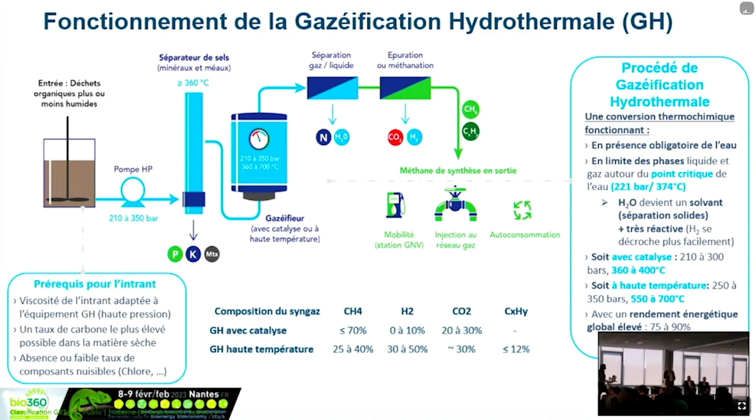To recover the gas, we separate what we call the gas to liquid. On one side, we get the high pressure gas, which we can recover or methanize to make it injectable into the network. On the other side, we recover a liquid, which is water with nitrogen. This can directly be reused, or sometimes we have to filter it, and then we can make it available to industry for various purposes. I think that's it in a nutshell.

I don't want to spend too much time on that.

I think here you've got an assembly of families of feedstock biomasses which can be reused and recycled using this technology, but also fossil waste that still exists, which needs treatment and high performance treatments in particular. There are industrial players in the plastic or microplastic sector, but also in the oil sector.

As you can see on the chart on the right here, this technology is integrated within this circular economy approach. We're trying to maximize the recycling and reuse. The final goal is to have as much as possible zero final waste, and to value whatever can be valued, recycle or reuse what can be, and to get rid of anything that may be harmful, in particular bacteria, viruses and other pathogens.

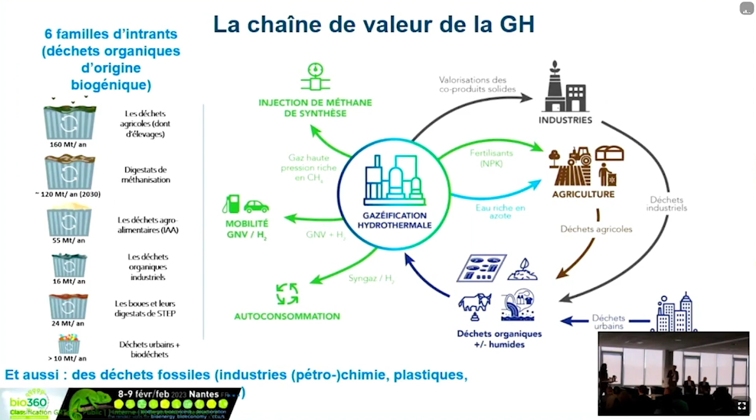We don't need much land here compared to methanization. It's 10 times less footprint we need here. Compact, it's modular. Why is it modular? Because we're looking at high pressures here for different reasons, we have to limit the size, and we have a modular approach here. Sizes for 5 tons per hour maximum. If the need for treatment goes beyond that, we add a second or even third module.

The energy yield is extremely high. In most cases, we're between 75 and 85%, which is excellent performance for this kind of conversion technology.

And we've also, if we take the GHG and the life cycle analysis, it's very positive here. That's what we see in literature anyway. But we're going to further improve things to make sure that we can use it in a very tangible and concrete way.

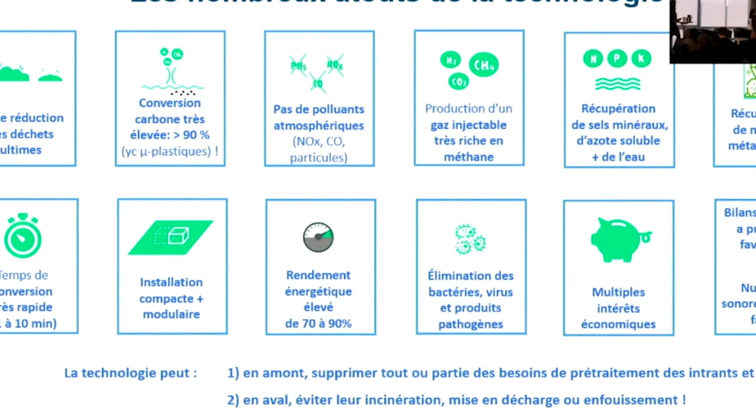And the last point is the sound and smell here. Nothing makes any particular noise, it's just the pumps. So it's quite silent as a technology, and we can very easily insulate it, and there's no particular smell.

The last point is a lot of financial and economic interest. Obviously, with the gas, we're generating significant added value. But that's not all. We can obviously inject it into the network, and we can stock it. In France, fortunately, we've got an infrastructure which is pretty good to be able to compensate the variation between consumption and production.

We've also got other additional aspects which we need to mention, the link to the service, the processing of the waste, and the use of this waste. Potentially we can reuse all of these other elements and byproducts, which means we have a great added value as far as this technology is concerned. And we've got additional revenue that can come by getting rid of or reducing certain costs that no longer exist or which are strongly reduced.

And then, sorry, I haven't finished, I haven't quite finished here. This is quite crucial here now today. I made this mistake, sorry about that. I don't know if we've got any copies of this white paper. If not, it would be good to bring a copy here and show it to you. There we go. Thank you very much for that.

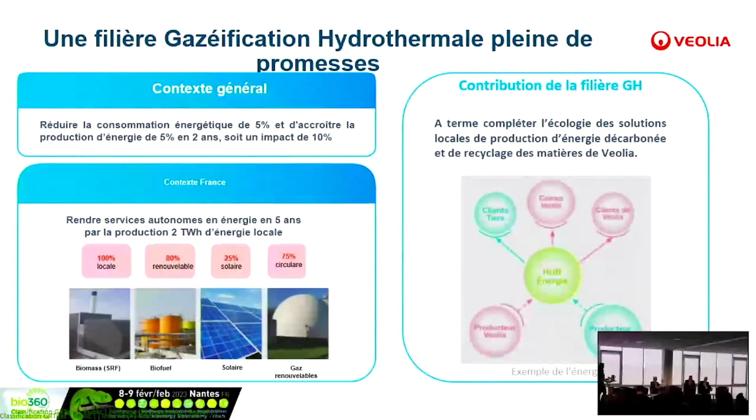If I come back here and go into a bit more detail, we're talking about these key challenges in terms of this sector we're participating in, this target which is net zero, to contribute to net zero. VEOLIA has clearly signed up for this. We've already got an offer, but once again, we can clearly say that hydrothermal gasification, HG, clearly ticks all the boxes here. VEOLIA clearly wants to target recycling, the recycling of organic material and also fertilizers.

And then afterwards, when it is not possible to recycle, then we can consider thermal recovery here or reuse. That's incineration. That's something we would like to avoid. But we can do it, because we can recover the heat.

And if you take the HG, we can clearly see it represents the hierarchy. We're going to produce gas, we're going to produce minerals, we're going to produce material, which will be fully within this hierarchy. In this description, we've got a process, as the title says, it's full of promise here, and it's going to enable us to generate revenue, generate services, and have a geographic approach, with scalability - small, medium, and big.

Now, our contribution to the HG - we got together with the public authorities here and local government here. Now, I have communicated this to my colleagues, but at last I can communicate and share it with everybody. This is the kind of foundation of what we want to do now and in the future.

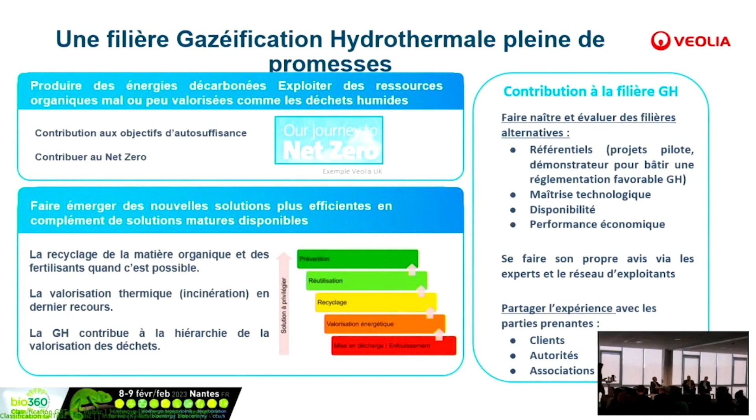We've already shared - a lot of effort has been made with Robert. We need to share with the users, clients, public authorities, whatever, provide a regulatory, technical framework as well here, and also a financial framework here. As I said, full of promise, and that is clearly what we're trying to develop.

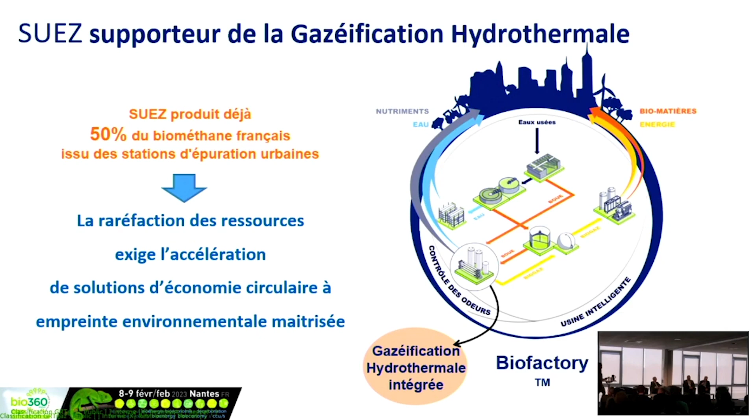You also are a member of this natural group, and you also contributed to the white paper. Why? Well, for all the reasons I just mentioned here, SUEZ was involved in this working group. I'd like to thank all the work that was performed by Robert and his team and the other people to be able to come with this great outcome, which is the white paper, and all the other work performed by the work group.

The white paper is the first deliverable here of this working group. In this slide, I'd like to insist on 2 points that you can actually find in the white paper. I always like to take the example of sludge treatment here. The development of this market clearly shows that the current solutions are facing issues in terms of acceptance and acceptability, and also facing more restrictive regulatory frameworks to avoid pollution and environmental impairment.

Now, as presented within the white paper and also within the discourse of Robert, hydrothermal gasification is the possible answer to this issue, and can solve issues such as pathogens, micropollutants that can be found in water, but also a possible coming back, making sure that the nutrients can go back to the soil here, and that can be better streamlined and better optimized, and the control of the environmental footprint.

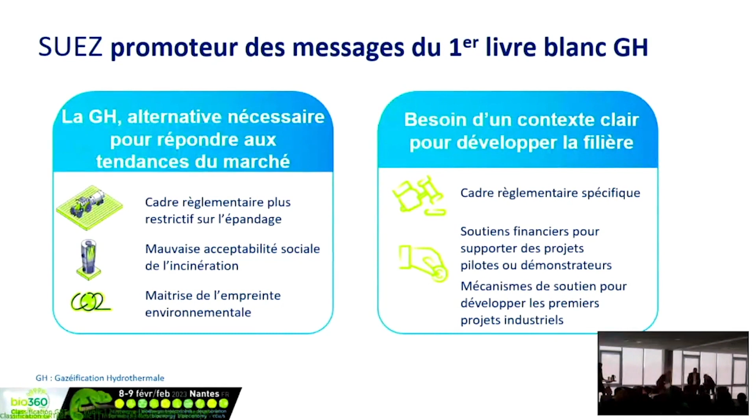We can move on to the second roundtable, which is focusing on technology. And we've got a special guest from the United States. He is the founder of the Genifuel company, and Genifuel is a company that is developing a hydrothermal gasification unit in cooperation with Vallejo. So we have here Chevaux as well. We will have Sofiane Zalouk and Javier Vallejo for the technology. They are responsible - the R&D manager and commercial manager.

We will have Frederic Juillard. He's the president of TreaTech. They are working on technology, and he has a team of 10 people. Frederic is responsible for the circular carbon economy strategy, and he's working in hydrothermal gasification as well.

So we are going to start with the first question that will be asked to Thomas Chevaux from Vinci Environnement. You are doing a collaboration with Genifuel. So what are the advantages for both parts?

Hello everyone, and thank you. Thank you for this invitation. Okay, maybe I will show you some images. Okay, no, is it working? Okay, there it is. Okay, maybe we can go back to the previous slide, please. No, maybe it's not working.

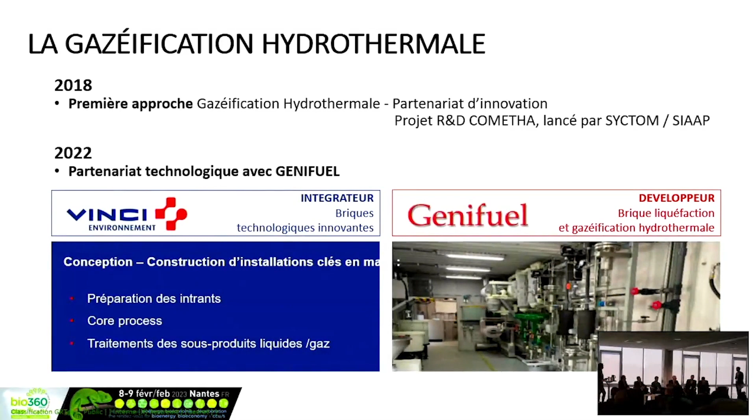Okay, in our company, well, we have been working for a few years - we have 50 years of experience. Sorry, my slide is not showing properly. So we have 50 years of experience in waste treatment engineering, and we mainly concentrate in the field of gas. Vinci Environnement is the engineering company that wants to offer different services. As constructors, we want to go more into GreenGaz.

So we've been very aware of the progress made in this field. After having worked in a partnership called COMETHA, we were able to show that this hydrothermal gasification process is very positive in general. So we tried to see how we could keep making progress.

So nowadays we've met Genifuel. They are present here. We have James Oyler here, I will give the floor to him in a few minutes. So we decided to work together. VINCI is working as the integrator, the design of turnkey plants, and in order to see all the process related to the preparation of the feedstock.

And the idea is that we could treat all these products. Genifuel will help us regarding liquefaction and gasification. Genifuel is a company that has been working for many years in this field, and they will have the floor later. But we thought that this partnership would give us the opportunity of accelerating our development, because we had a certain maturity in the field.

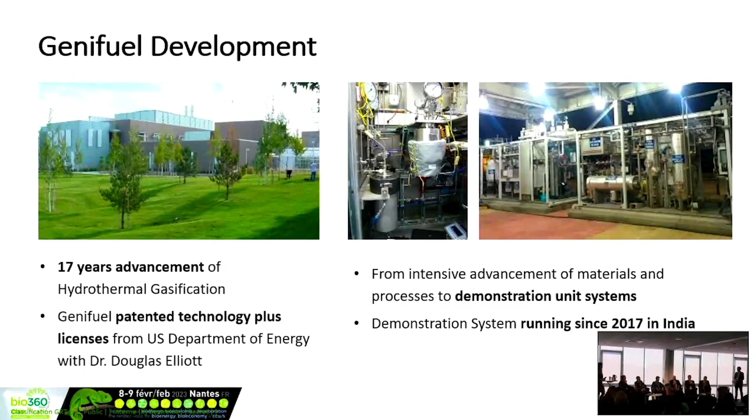In addition, since that time, we've built several other systems. One of them, which has been very useful, is a mobile system that can be moved from place to place. It has been operating in multiple locations, primarily for the processing of wastewater sludge, in multiple cities - first in California, then in Oregon, and then most recently in Florida, with several cities, including Orlando and a smaller city just north of there. We can move this from place to place to demonstrate with different processes, different wastewater processes, and different types of sludge. So we have a scaled up system that we built for India, and then a smaller system that can be moved from place to place.

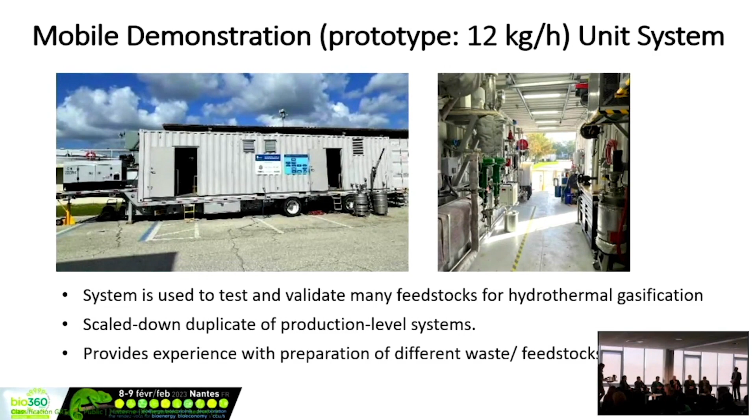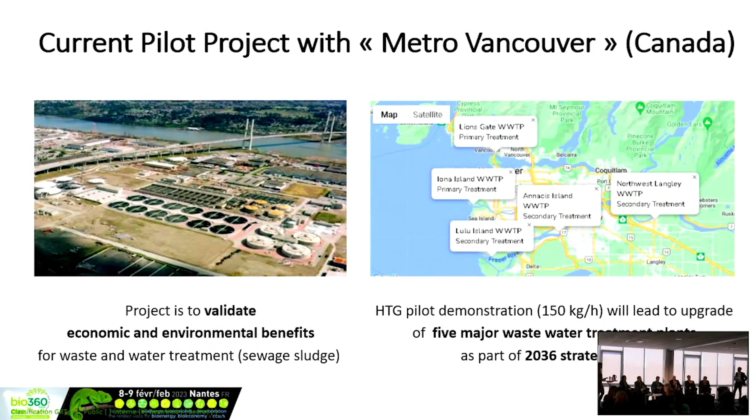The next project we've been working on is also wastewater, for the city of Vancouver in Canada, at one of their large plants. Vancouver has a population of just under 3 million people. There are 5 plants that provide the processing for that population, and we are at this one shown on the left, which serves a population of about 25% of the city. We will not be doing all of that flow - we will do a portion of it in order to provide data for the city to implement this throughout all 5 of the treatment plants. That project will extend through the year 2036. It's part of a large strategy to upgrade the entire system to hydrothermal processing.

So this has many advantages that we have developed for both hydrothermal liquefaction and hydrothermal gasification. And I'm going to give this back to Thomas because this is a very busy slide and it's easier for him to do this in French.

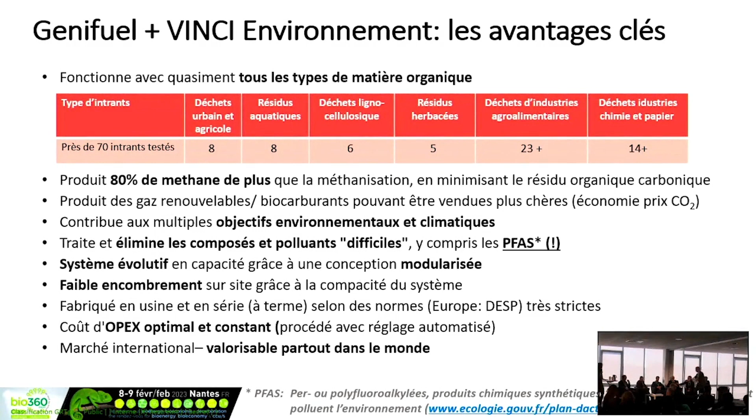So how did you end up positioning yourselves in gasification? How are you thinking about how you're positioning yourself in this kind of situation?

Yes, it was quite natural for us. The idea to concentrate on hydrothermal gasification, it's a good experience for us.

So hydrothermal gasification is a treatment for organic waste. We have another way, we are using hydrothermal oxidation with less oxygen, so there are many different conditions that we can have.

So the idea is that we are going to learn more about the materials and the processes. So we also have a KIT, so we are developing a European solution in this case.

We are located 15 kilometers from France, near Strasbourg. So the idea is that we have a laboratory where we have an installation, and we are trying to create a pilot project in this sense, and then after that we could have a bigger facility.

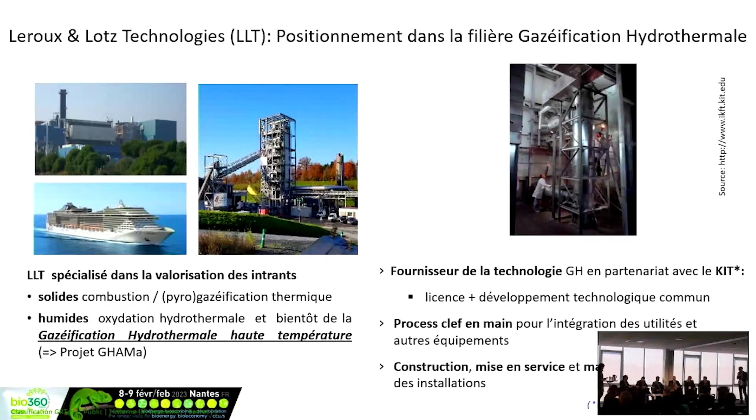I will give the floor to our colleague, Stéphane. So now you are working on the development of the technology, you are working on the GHAMa project. So where are you now in terms of technology, and what are the specific facts that you would like to point out?

The GHAMa project is a project of industrial demonstration. The idea is that we would like to treat what is produced at the LEROUX plant. Nowadays, we are in the course of engineering studies, so we are studying the equipment, the reactor, and all that.

And nowadays, the idea is to continue with this study in order to see how we can improve the price of the demonstrator, the financial aspect. So we want to improve all that by next year, and we will concentrate on this demonstrator.

So in 2024, maybe we could do some different tests on this demonstrator. So in order to come back to Robert's question, in this case we have an industrial demonstrator with a high capacity. The idea is to see how we could test two different configurations and to have a facility that will work constantly in a permanent way.

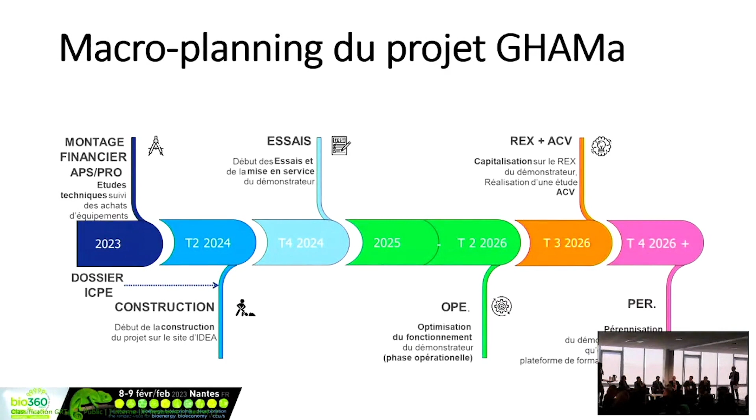Thank you very much. We have another question for Frederic. So you have already done a pilot project. What do you think will help you keep developing this project, and what are you concentrating on?

The idea is that we have 100 kWh being built in a partnership. So we have created a different company. Before that, we spent many years devoted to research and development. With the Paul Scherrer Institute, they have a lot of experience regarding this catalytic work. So the HTG, hydrothermal gasification at a higher temperature, is key for us.

This catalyzer has quite a high selectivity, and this will allow us to work at different temperatures. It will give us the opportunity to have catalysis and to see how we can reach the synthesis gas that we would like to have.

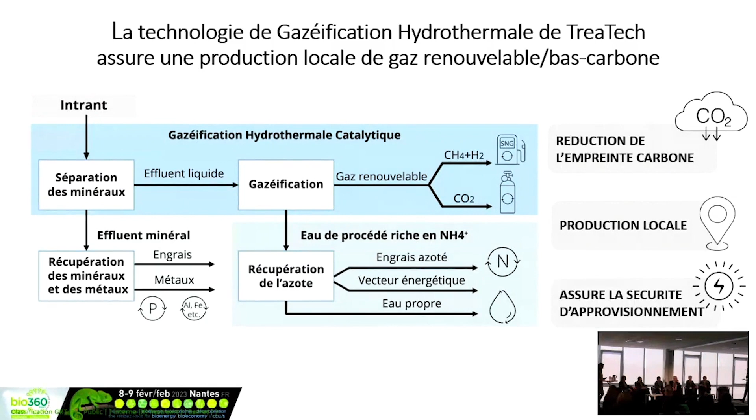So where are you working now? What are you exploring in this field? Maybe you could speak a little bit about what you're doing. Thank you.

Okay, so we started making some studies with different feedstocks, feedstocks that could not be transformed or converted into gas. So these were feedstocks that should be reused.

Sorry, the sound is very poor. We cannot receive the message properly.

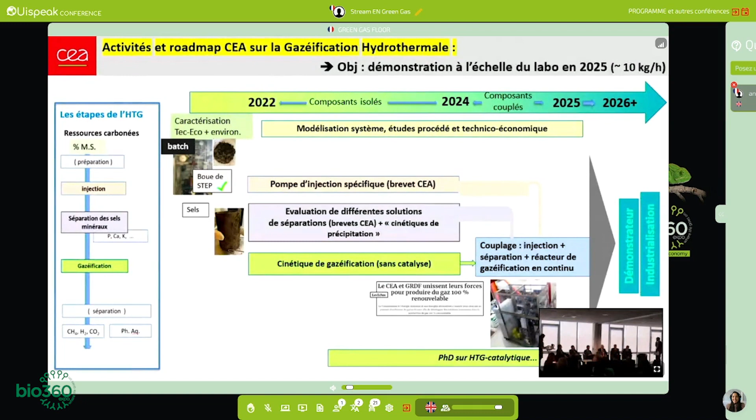Thank you very much. I will finish with the last question that I would like to ask Thomas. I would like to know your opinion for the 2030 horizon, how you are expecting to develop the French market in this sense regarding this technology.

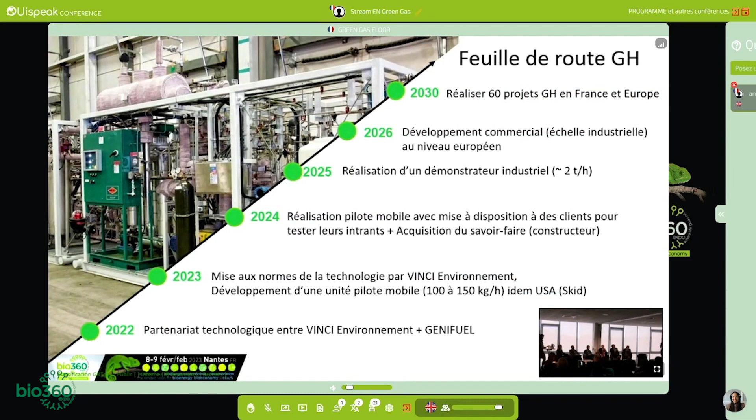Okay, our roadmap, well, we've made a small program over the next 10 years. The idea is that we want to keep progressing in our partnership with Genifuel. We want to develop pilot projects with a design similar to the one we made in the United States.

So we are going to do this kind of technology transfer. This pilot project will be available in 2024, and the idea is to do all the feedstock tests regarding the know-how as well. We will keep working with this industrial demonstrator in 2025, and we will do the commercial development at a larger scale later. So this is our roadmap.

Same question for Frederic Juillard: what are the next steps for the development of this technology after all these successes presented here?

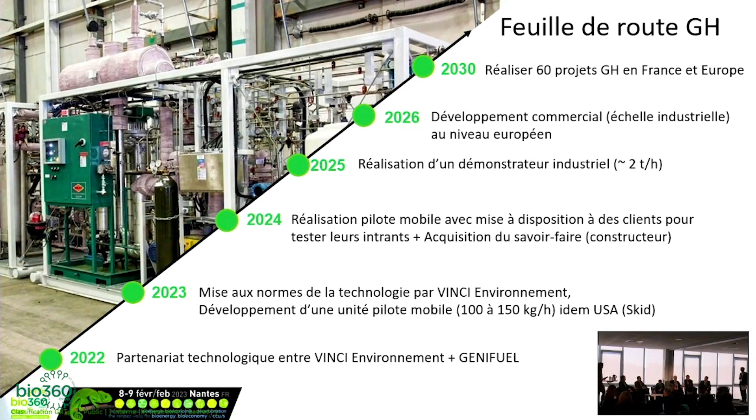This is a small picture of what we plan to do. By the end of the year, we will have finished construction of the pilot unit. The idea is that we will start operation in 2024, the commissioning, and after that the operation. We will try with many wastes, and then concentrate on different wastes. We are still working on the design of an industrial unit, and the idea is to have 3 tons per hour, then we will see how it's working. We still have many aspects to consider, but for industrial treatment we might achieve it by 2025.

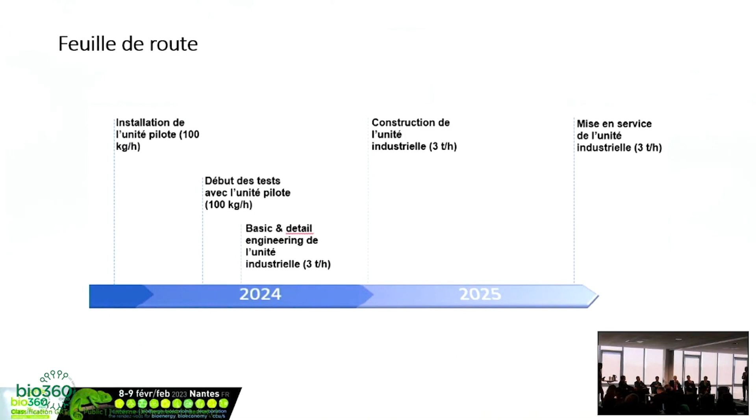And last question for Sofiane Zalouk: what is your roadmap for 2030? What are your priority markets, and how is the GHAMa project going to be developed?

For this GHAMa project, the idea is to focus on the industrial demonstrator in 2026. This will be the first industrial facility, created in 2027, with a size between 4 and 8 tons per hour in order to have good profitability, and we will be making a second facility before 2030.

Thank you very much. So we have time for 2 questions. If there are any questions here, please go ahead. Everything was very clear, I think. Yeah, there is a question here. Yes, I have a question.

You never mentioned the price of the gas after you produce it. Will it be competitive, the price of this gas, if we wanted to inject it into the grid? So what would be the price of the gas? Maybe Frederic, you can give an answer, because I think you have made some simulations in order to make estimations of the price.

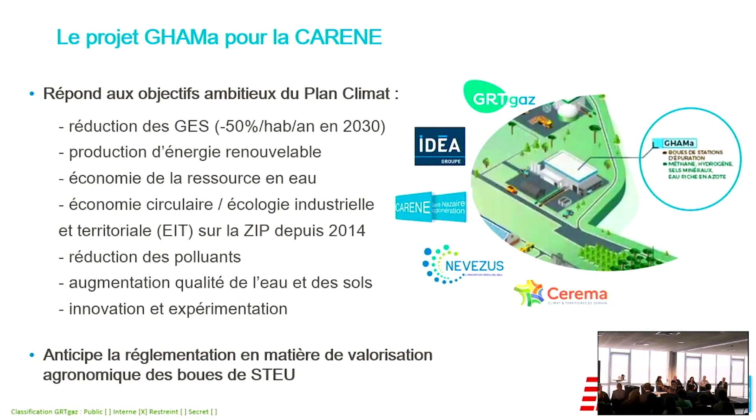Now, we talked about this project just earlier on. We're at demonstrator stage here. Why is the CARENE conurbation interested in this? The key principles are on the chart. We really want to demonstrate its feasibility, the technology, but it has a reason, a definite purpose here.

Let's take into account everything, this promise, and what the feedstock is. I mean, the sludge from the water treatment center, that's one source. But what can it offer as solutions to other possible entrants, other possible feedstock? We want to test what is possible. We want to test these feedstocks.

And then in the end, this promise, this environmental promise, is it really there? Is it really feasible here? As a conurbation, if we want to be within this project, we want to be 100% sure. I mean, the water, once it comes out, can we remove the nitrate? Can we make sure that it comes back to the natural area without having a negative impact on the environment?

Renewable gas, how are we going to reuse it here, because we manage public money, taxpayer money here, this model that has to work. It faces other issues here. The market, will it actually be able to make sure that this kind of project will be in place on time to meet the climate and energy goals?

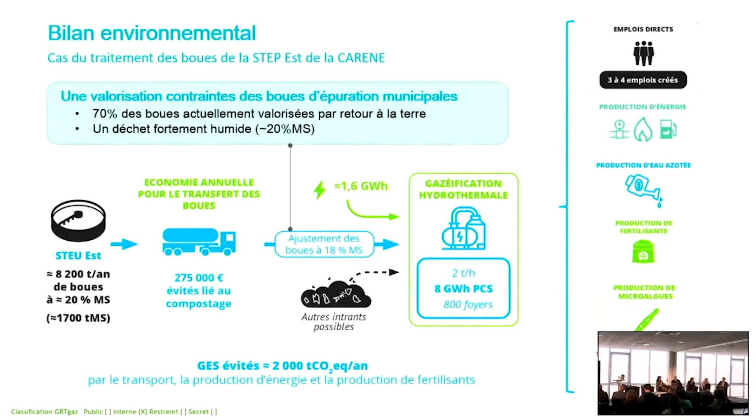The activity of Arkema generates products that aren't easy to recycle and reuse. How can hydrothermal gasification enable, obviously, an improvement here?

Well, my name is Serge Schuffer. I'm the site project manager for Arkema Carling here. Now, in that area, there are various companies, including Arkema. The platform is currently strongly developing. We produce acrylic acid and its derivatives like esters and super-absorbing elements. We produce what we call heavy acrylics here.

We talk about over 10,000 tons per year of organic components here. Part is reused and produces steam, and otherwise it is externally used with CO2 emissions, because we're talking about incineration, and it leads to logistic costs.

Initially, we also manage treatment plants here. We are involved in a biological plant treatment. We had some discussions with GRTgaz. We had the idea of going for hydrothermal gasification here, and we got in contact with various partners. When we talked to different people, we realized that our heavy products could be interesting for this technology.

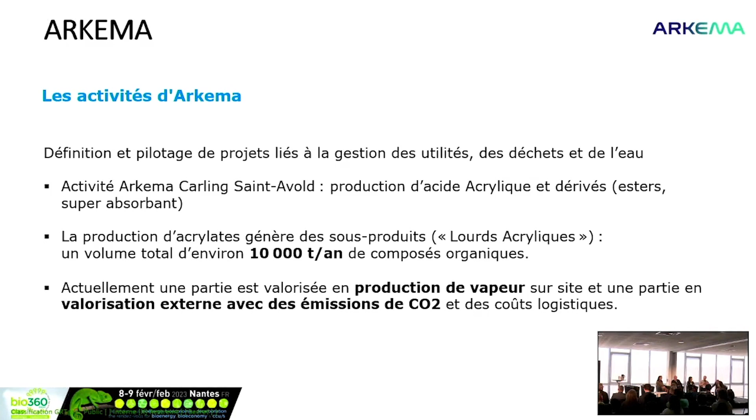The deadline is 2030. I don't think it's going to be possible to do things before 2030 as such. In 5 years, an on-site demonstrator, and in 10 years, around 2030, we can imagine an industrial unit on site, and probably other sites, factories and plants of the group may be concerned as well.

For the moment, we've worked with TreaTech. The results are pretty positive. Our components or compounds are a bit specific, not that easy to process, and may contain metal as well. So it may be interesting to be able to recover metals from the catalyzers, instead of sending it to incinerators. Thank you very much.

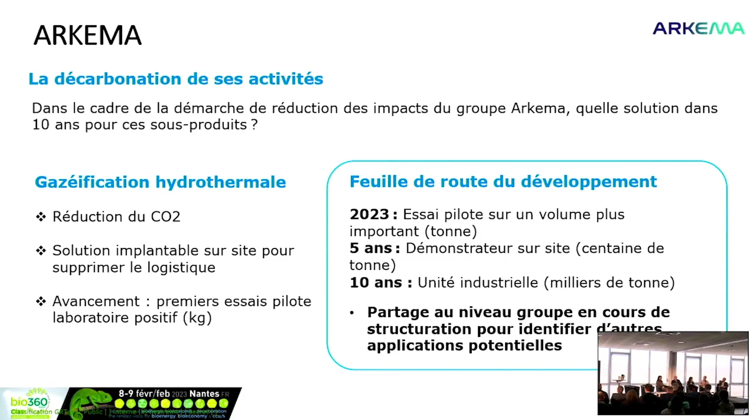It's on the floor to Mr. Lalizel, who works for Cristal Union in the agri-food industry.

Thank you for all these questions. Cristal Union, we are a co-op group. We're specialized in the transformation of beetroot into sugar and alcohol. These activities require a lot of energy. Overall per year, we consume about 3 terawatt-hours, mainly as gas.

This big energy consumption means that we have to declare our emissions within the ETS framework in France, and the goal is to decarbonate. We want to significantly reduce our emissions by 2030 and 2050. The challenge in terms of decarbonation is extremely important, and we haven't waited until today to start working on that. We've already got 25% of our energy coming from biomass, but we still have 75% to deal with.

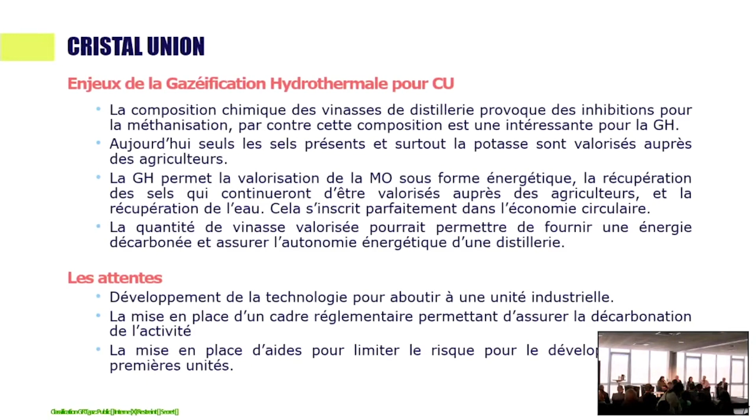As I said in the introduction, the presence of water in the process is crucial. However, if you take the feedstock—and the example speaks for itself—Arkema's feedstock doesn't contain any water. The water is added to the system, but since the system recycles the water, there's virtually no water consumption as such, and it works well. It's a closed circuit, and the conversion rate is extremely high—we're close to, nearly reaching 100% with some of these feedstocks.

To answer your question, for Cristal Union, we're talking about 3 to 4% mineral. The rest is organic.

Mr. Chauffeur, did you want to react? Yeah, we've got the conversion for the initial trials at lab scale, of course. We're close to 100%. We're recovering very little mineral matter and water as an output, and that can be recovered or reused, but the organic feedstock is totally converted otherwise.